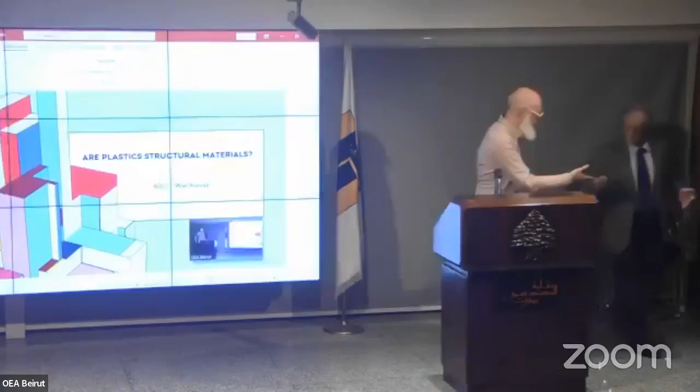Okay. So we'll switch documents. 1 second. Okay, we'll start on page 1. Not 32, or I guess I can start that.

So I will first introduce the practice in general, because we are a research place where we work on materials. Today, of course, the focus will be on recycled plastic. So I'll switch back to start, sorry, a bit quickly. Where is the document open there? So here we are.

I'm directing two practices. One is located in Lebanon, it's Bits to Atoms, where we work on digital fabrication, and the other one is Post-Industrial Crafts, which is located in France. So I'm an architect, I make buildings, but I also make robots. And I also hack old robots from automotive factories, and then I transform them into large 3D printers with which we do furniture, which we sell.

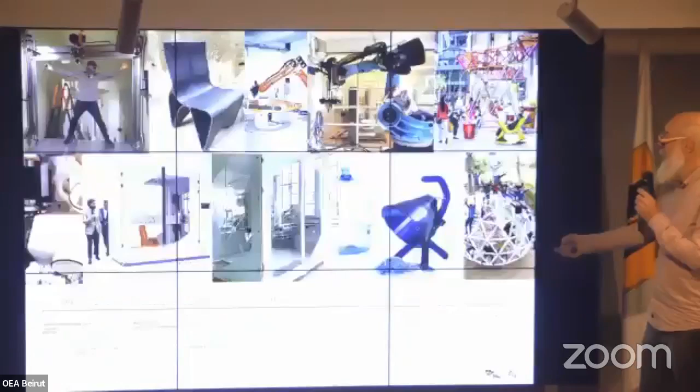So this has been a long journey. This is about the last 10 years, from creating my first own 3D printer 10 years ago, and then doing first furniture, then buying my first robot, transforming it, etc., until we reached a point whereby from furniture, we moved gently toward the architecture scale. So this has been done through several machines, through several systems.

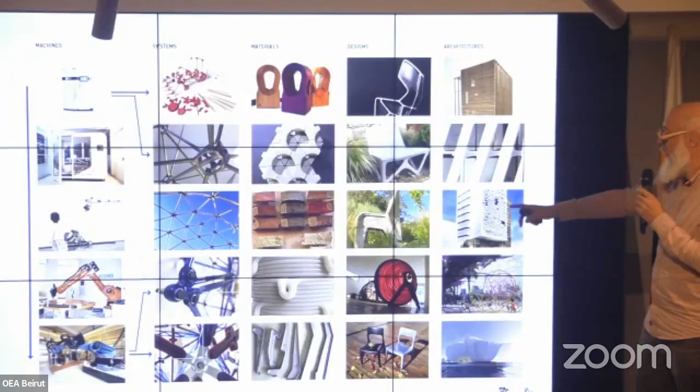So we first had the first 3D printer, got our first robot, and made our first 3D printing robot to create various structural systems using various materials, from recycled paper to wood, concrete, recycled aluminum, recycled plastic, to work first at furniture level. That's how we do our small prototypes, because it's relatively not as costly as doing architecture. And then we either use our architecture projects as a reason to experiment with the material and the process that we are setting up with our robots, or we do our own research.

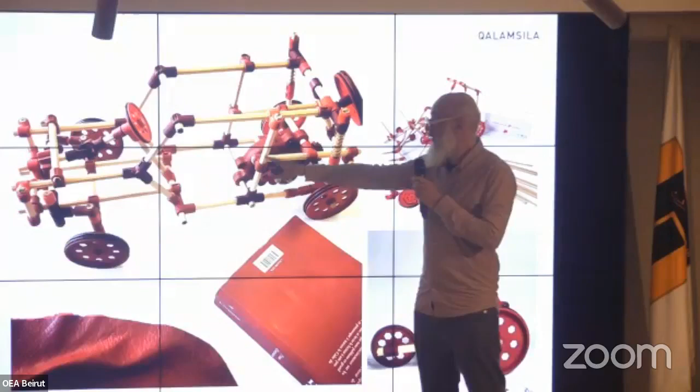So we've always been very much into structure. So 3D printing with plastic, with a laser printer, we've been creating this construction toy, which allows kids to play with wood pencils in order to build about anything. So you see here, that's how I became a bit of an engineer, because I designed an engine which works with a spring, but I had to do everything in order to make it. So it was quite fun for an architect, to do a bit of engineering.

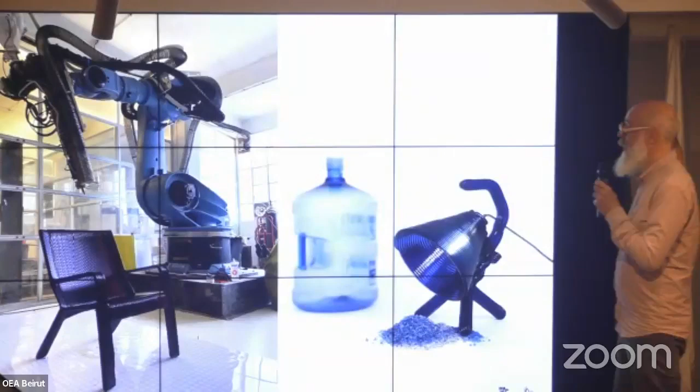And we have our machines, we get them used. We build the extruder, and we build the controller and the codes to make them work. And with this, we manage to produce some stuff. So what we do is that we collect from the environment bottles, which are made out of polycarbonate. Once they get a bit too dirty, they are trashed away. So we recycle them, we crush them, and we use that crushed material in our robot in order to produce furniture. So that was the first move.

You can see the first chair we've ever printed. That was like 4 years ago with our first machine. And then we moved on, and we're recycling more materials. Now we're recycling car headlights because it's a very good polycarbonate, which is quite transparent, which allows us to play with color.

And we started gently in our furniture to make structures, because indeed, you can see that those parts are 3D printed, but also the center one, the structure itself of this large lamp, is also 3D printed with an assembly, a bit like you would assemble wood somehow. Still a very basic assembly, but you can see some triangles which are there for structural strength, which are carrying this structure. So we got our first small contracts.

This one was for Hermes in Dubai, and it was a very little architecture scale, but we only did those panels, in fact. So the structure is still a wood structure on which they are mounted, which was not really quite interesting, but that was the first move. And from that crushed material, those bottles, we started to print beams, and you see, we prepare a hole for a connection, so we could do some assemblies, and we could start to be structural.

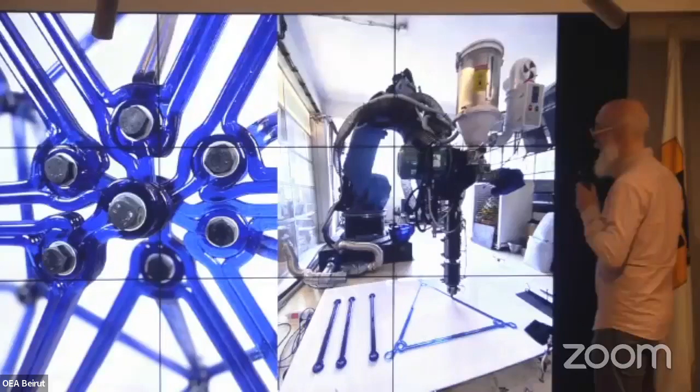So the first approach to structure was to have a first layer of triangles, then tetrahedrons, and then hexagons, and create a space mesh with this material, which is very flexible. Compared to concrete or steel or whatever, you're facing a very weak material compared to what we're used to. So you need to put more brain into it and more geometry in order to get the strength you need. And you need to give it more volume.

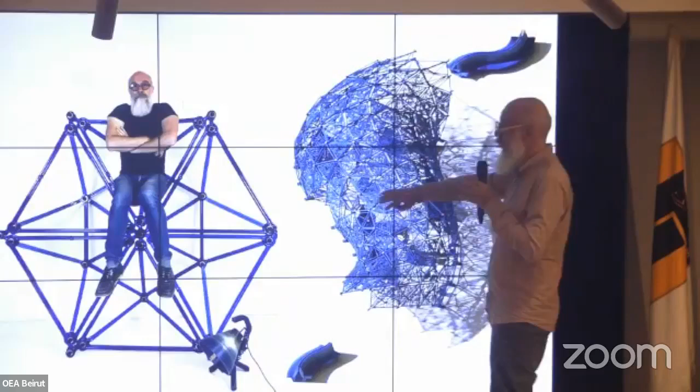So you can see the first attempt, the first prototype we did of a space frame. I'm sitting on it because obviously the strength is directly in question as we use polycarbonate, which has a lot of qualities, but you see this one here, it's bending under half of my weight. But when it's all together and the pressure is applied directly on the point, you can still cross some good distance. And because you've got a great height thanks to this structure, the ratio of the weight of the structure compared to its capacity is interesting.

And the good thing is that as this design is entirely coded, our code takes the base geometry and sends it directly to the robot. We can have extremely complicated structures with every beam and every triangle unique. The complexity is not a problem for us because we don't see it. It's all managed by the code that sends it directly to the robot. We just have to order and then assemble them, without having to know any number or any angle in this kind of structure. It could make things complex. We still didn't reach there, but we started to reach some elements.

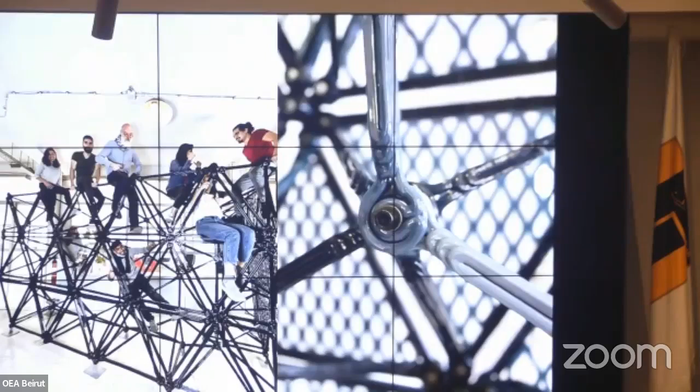So the recycled plastic has various qualities and comes from various places because we have to gather it a bit everywhere in Lebanon. It's not completely easy to do. But you see, we start to have some structural answer to this thing. As noted, it's not really calculated. It's more we do it and then we jump on it to see if it's strong enough. That's a bit the technique. But it's a kind of valid technique when you have a big workshop and you're able to print like this. You learn a lot more by doing it than by trying to simulate it. And somehow it was useful.

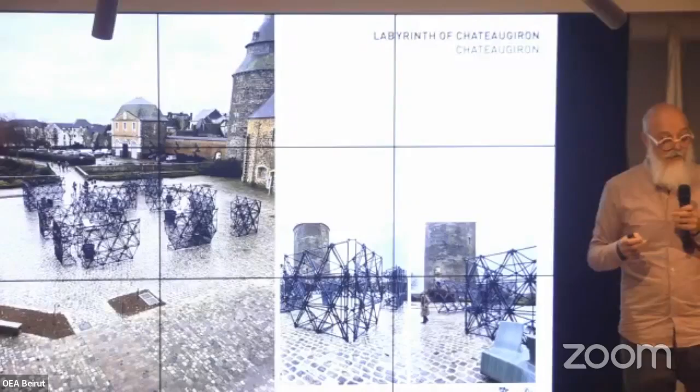We used it to answer a competition in France. And now this structure is a permanent structure in France, in the courtyard of a castle. It creates a labyrinth, which is dismantled and rearticulated to host 3 festivals every year, and in the empty time another shape of labyrinth is created, doing placemaking inside the large courtyard. It froze one morning we were installing, but polycarbonate is also used for astronaut helmets at -250 because it can stay flexible and resistant at these temperatures. That was a freezing morning in Brittany in winter. The contrast between this weird structure made from about 30,000 recycled bottles and the old stone was quite interesting, and part of the success of this installation.

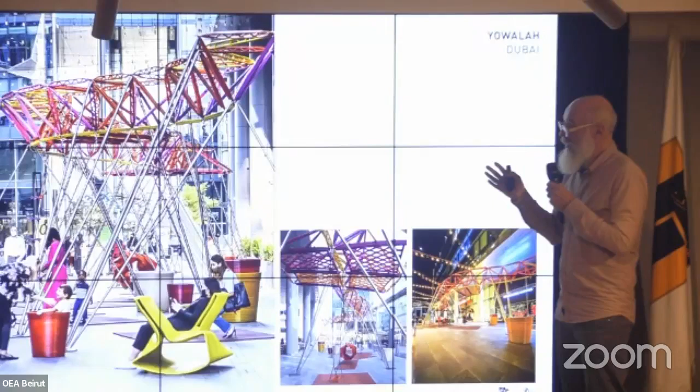We did it again in Milan as a support for an exhibition. This time we got a lot of transparency by the change of material. We pushed it further by making it the center of attraction when we answered the competition by the Royal Commission in Dubai to create an attraction in public space to get people out of their homes post-corona, to do some sport and have some communication. We proposed to build a large beam spanning 40 meters long at 3.5 meters high, made completely out of recycled plastic, that would hold people swinging under it. And this time, this beam was completely made out of recycled plastic.

So we had to make every segment also a beam itself with reinforcement in order to get the strength needed. But somehow we managed to get a structure that was really sturdy with almost no flex, very strong. All the moment, the resonance or whatever, it worked very well.

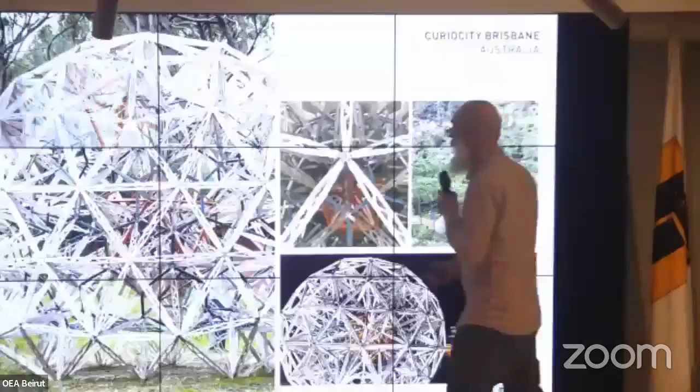The thing we had to do to reach this is insert a metal flange inside the print while we were printing, so the flange would be stuck in the plastic. We did some traction tests, and it needs above 1.5 tons to take it out. It doesn't get out - in fact, the plastic breaks behind it.

And this allowed us to connect many points on one screw. Because with plastic, we needed to make it a lot larger - you need to enlarge all the dimensions because your material is several times weaker. So if you get many beams with that enlargement, you get a giant knot and you cannot make it through. So this was a good solution.

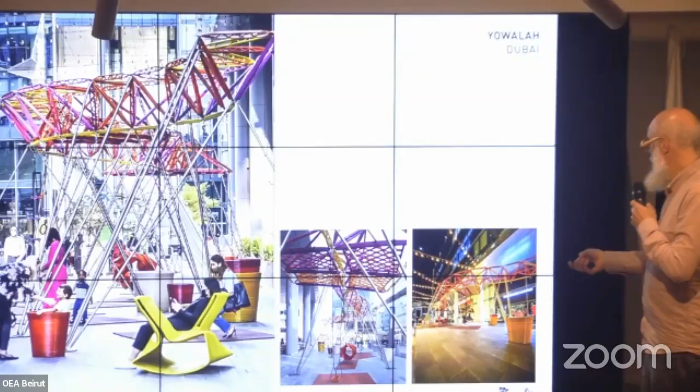And you see, we did everything in recycled plastic - from the ladder things, the rings, the seats and stuff, but also the seats for the swings. It was assembled overnight over there at the show, in kind of those conditions you get when you're inside a festival. With great success, and it became - it was just a test, and it became a permanent installation, which is in a park in Dubai.

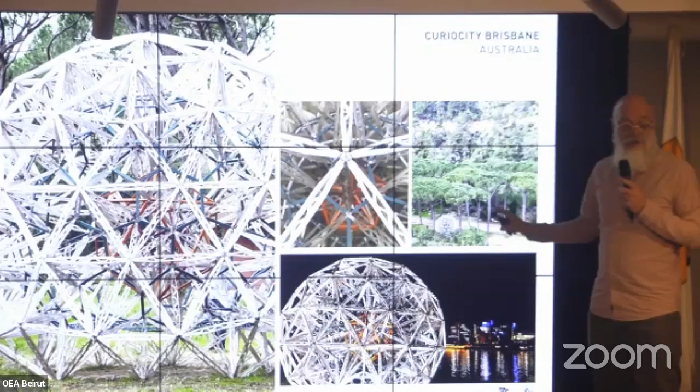This was also a bit more pushed, one in Brisbane, Australia - a competition that we built here in Lebanon. This is the test assembly. It's the architecture student that built it again in Brisbane, next to the Brisbane River, for an art festival.

And so the same system of beams - you see, I'm standing on it, so it's always a bit the proof of the idea, because of course, as we don't calculate it before, we do it and then we test it, and then that's how we prove the thing, and then we assemble it.

But we use shapes which have a lot of intelligence, and we use that instead of doing a big slab a bit stupidly. Here we have to use a very intelligent shape that would compensate for the weakness of the material, so the proportion of strength is reduced and the proportion of intelligence in the shape is very much enlarged. That's why we get this kind of shapes.

So this made us think further. Instead of thinking with segments, we started to work more as cells - assemblies of cells which are printed separately, and kept together to create larger elements.

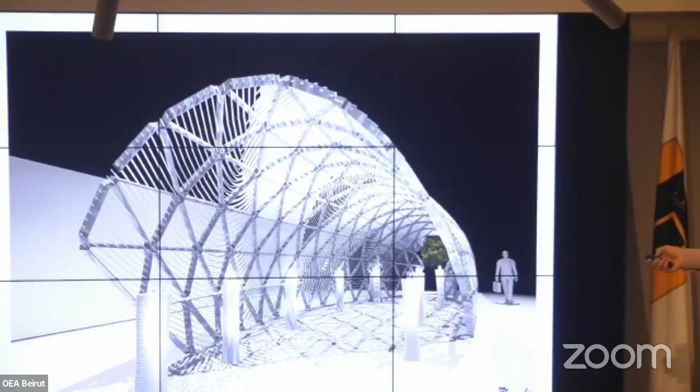This last one is for a French perfumer—a pavilion, which is very interesting. Instead of paying someone to make a stand with a stand designer, they preferred to invest in someone doing research for architecture. They gave us a subvention for our research, and in return we gave them a pavilion as a result. It's far more productive than making a stand and then trashing it. They're even sending it back to us so we can recycle it and give the plastic another shape another time.

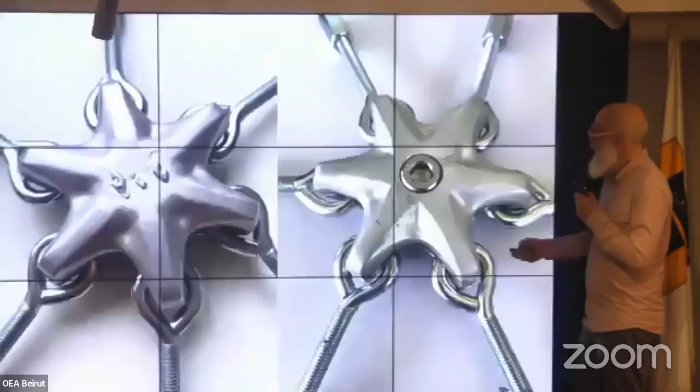This was a 3D printed model, and this time we had a clearer condition because we only had hexagons divided into 6 triangles. So we had connections with 6 — we were at the limit of the structure.

We took the occasion to design connectors made entirely from local recycled aluminum. You can see it could be open — it's a kind of star — and it has two faces held together by one screw.

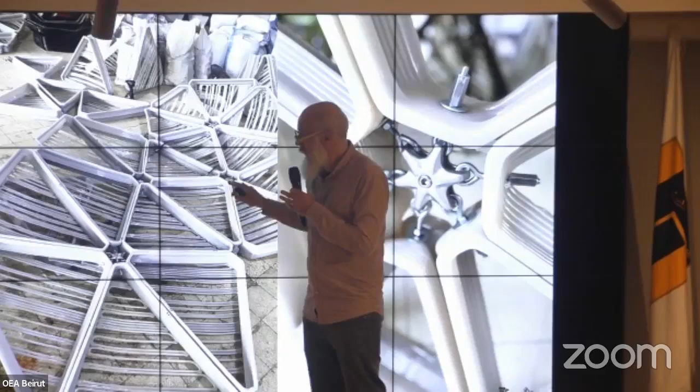This is the one we put in the same way as explained before, putting together those cells and connecting the ribs, the stiffeners, which get into one another. Because of the code and the angle on the walls, when you put them together you start to create the full shape of the pavilion.

Here you can see the scale — you can see workers inside in yellow, and that's the scale of one triangle. One triangle is about a meter. Of course, there are 190 triangles, and they are all unique, all with different shapes, but the average shape was about a meter.

That's how you lie inside of the structure. You could see the hatch we put in, continuous, going through all the elements that are printed separately. But when reassembled, there's a continuity of the structure and the texture — a bit like a river flowing through the shape. So you have a kind of 2D shape and a 3D shape merged together to create this intriguing object.

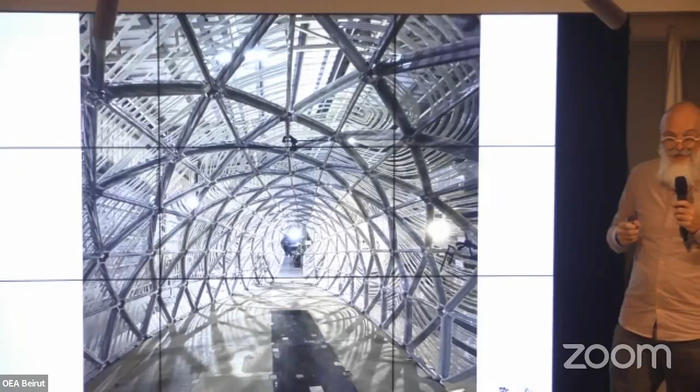So here was the first dry run in a location away from the exhibition, because we had very little time to do the full assembly — we had a single night to do it before the show. So we trained a team of Bangladeshi workers. We explained the logic of the puzzle, and they all found it very fun — they collaborated a lot and got very fast at it by the end.

It was very, very interesting for us. They understood how this was conceived, and it was a very nice experience with the team to make this happen.

Finally, it was built on place, and the perfumer came to present his creations, which were all put very preciously on stands that we also 3D printed from the same material. They were lit from inside, giving reflection and quality to the product on top of every element, like few trees inside.

Of course, at the limits we had special conditions. Here you see we're on an edge, so we have only 3 triangles. We still need to pull them all together, but we don't have anything on the outside limit because we cannot put any anchor on the ground in the exhibition space — the structure has to be self-contained and self-maintained. So in fact we had a piece that fit very well inside the female stiffeners on both triangles, resisting the pull from the 3 triangles, which stayed closely together.

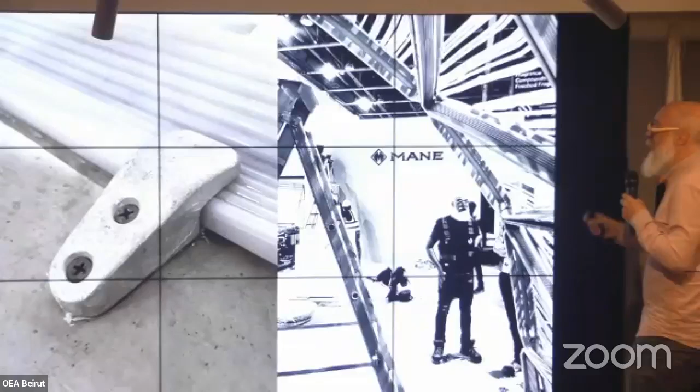A kind of connector that we had the right to put 1.6 centimeters into the ground. So we also created some connectors there to make sure the structure would not shift if any crowd movement bumped into it and took it away. You see here it's during the installation, during the night, when we had to build it.

The latest one we did is trying to be a bit better, because this system has a problem. We drill through the plastic, and it's a weak material, and we're making it weaker. If you drill through it, you create a hole and remove some matter. If anything's going to break, it would be where the hole passes. So I was trying to think of a way to keep those cells together without making any holes.

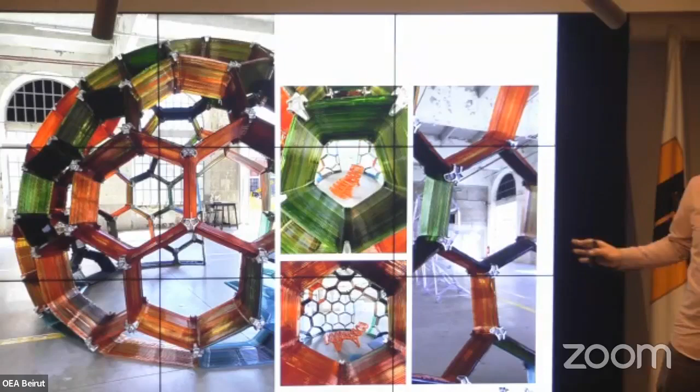So that's how I created another type of joint, made also of recycled aluminum and recycled plastic. The cells are another cell system, a very regular one. It's like a carbon atom, meaning you've got one pentagon and five hexagons around it.

They all have, this time, stiffeners which are towards the inside. And to keep them together, you've got two connectors, which are grippers. They have three fingers, and one bar in the center, and they are put into compression. The more you tighten the screw, the more the three cells are getting secured.

And this way, you secure the assembly, and you don't create any weakness by making any holes into the system. So this has been assembled in France and will now be part of a science museum in Saint-Étienne. This prototype.

The cool thing is that it's made from car headlights. It has a lot of property with the sun and the light. It's quite interesting, and we're going to put some light inside, because we have those two inward stiffeners which are creating a void at every member, and then we'll be able to pass some light inside of this.

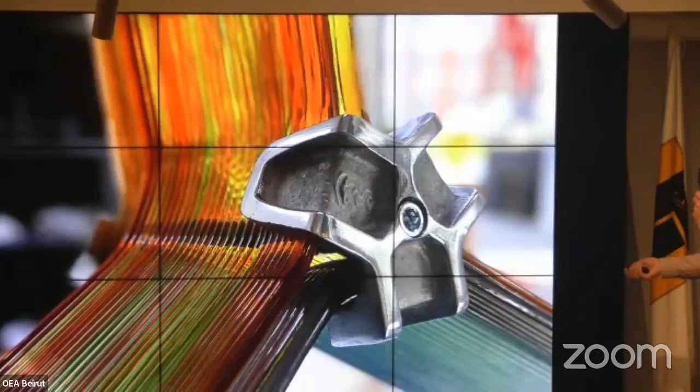So you see, this is a connector in a close view, which is keeping those three elements together. This time we also had only one condition, which was having three cells touching together, because they're all hexagons or pentagons. Now you see the connector itself, to save some money and some material, has also a stiffener and the same wall thickness all the way.

Be sure we have the best result with the cast aluminum. And you can see the stiffener, which is also taking the efforts together to the screw.

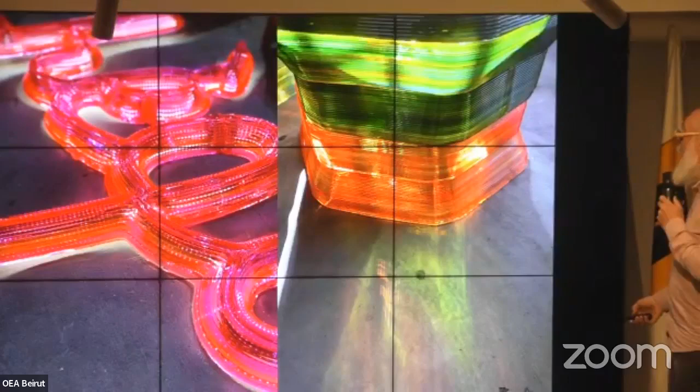Here you can see a bit what's happening with the material in natural sun, and that's how through the surface, which creates a lot of refractions, a bit like a Fresnel lens, and that's what's happening when we're putting some light inside. It's quite fascinating, and so it's a very nice material. It's very rare to be able to build with this kind of property.

One interesting thing is as we print those cells on the ground, we can also print anything at the same time, which means we could print the closure, we could print shelves, we could print tables or benches, and they could be part of the assembly later on. So we could build on this, and we could add a lot of things as we build them, and they could be different. Here you see the test of a bench, of a chair, which are part of one hexagon and another hexagon, assembled together with the same version of the design of the joint before we evolved it.

So the next steps, we discuss a lot with artificial intelligence. It's very funky to throw stuff and get stuff back, to discuss and chat with those systems. We do stuff, we see some stuff, we discuss stuff, and we do other ones.

This is the last chair we did. We created a very funny code that makes hairs. It prints in the air, and so some part of the print falls, creating a kind of a hairy surface on the back of this large armchair. And you see the material is almost glass-like there, because we have very nice material.

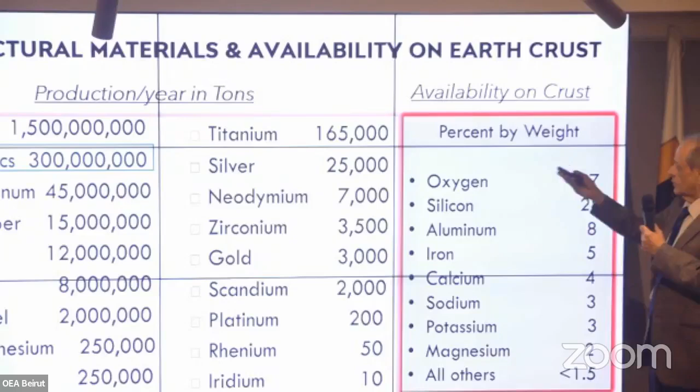And let us say that plastics is the second material being produced, followed by aluminum, copper, and zinc, and whatever. So plastics are not rare materials. We have a lot of plastics in this country and around the world.

Now, plastics, what are plastics? Plastics are synthetic materials or partially synthetic materials that are made of various organic polymers. Polymers, they contain carbon, hydrogen, oxygen, and organic matter. And they are always of a large molecular weight. The molecules of the plastics are strong, but the bond between one molecule and the other is not. This is why they are somehow flexible.

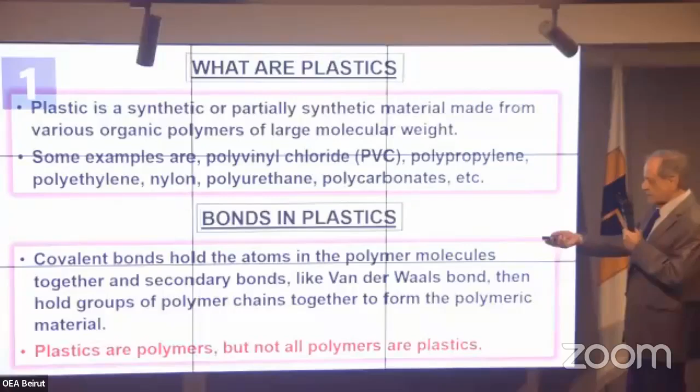Now, the bonds between the atoms of the plastic unit are covalent bonds, while the bonds between one molecule and the other are weak bonds, much weaker than the covalent bonds or atomic. Now, say that plastics, all plastics are polymers, but not all polymers are plastic.

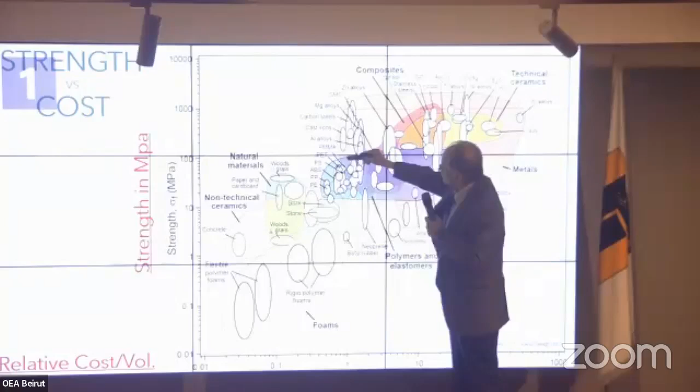Now here I have an Ashby chart that will show us the strength of materials versus relative cost. As we can see, while plastics are here, of course, carbon steel is stronger.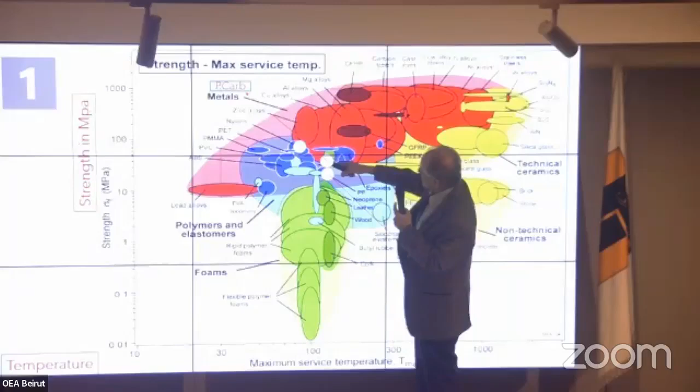In the other Ashby chart, we can see the strength of a material versus the workable temperature. Let us say, we have here plastics in this area, and I have chosen polycarbonates, which is here, and nylon that are here, and we have polypropylene here. I highlighted these because they are the most important ones.

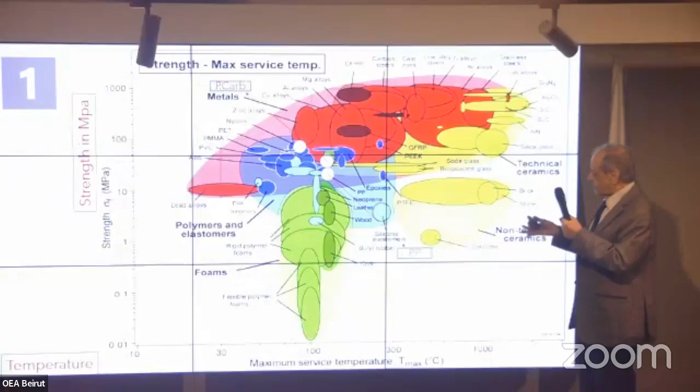Now polycarbonates are strong enough and they can work in relatively high ambient temperature. It doesn't melt at this temperature, and it can be used without excessive elongation at this temperature. So if the ambient temperature is up to 100 or even 120, still polycarbonates can work.

Now, properties of some plastics. I made this chart to show the properties of some plastics. Now, polypropylene has a density around 0.95, slightly less than water. And the Young's modulus of elasticity is low, 1,300 megapascal, yield strength of 33 megapascal, and an ultimate strength of 40. These are average, not really exact, because all plastics have different grades.

But polypropylene has a unique thing about its elongation. Sometimes it breaks at only about 8% elongation, and sometimes it goes up to 600%. I mean, it will elongate very long before it breaks. This is because of different configuration.

Now, polyethylene, we all know there is polyethylene of high density, low or medium density. That's why the density really changes. Now, the minimum modulus of elasticity is this, but the higher modulus of elasticity I didn't show here because it's not yet fixed. And its elongation is 100%.

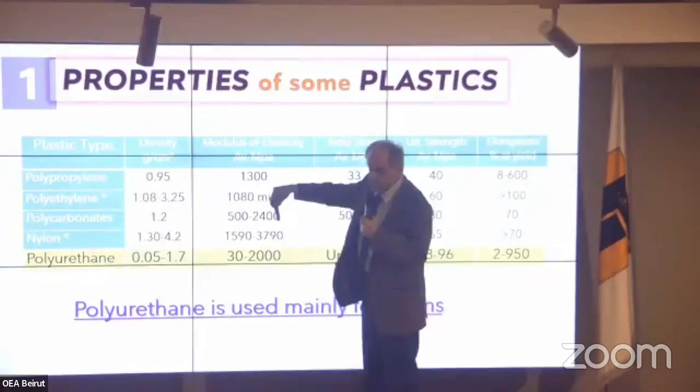Now, polycarbonates, their range is much smaller. That's why the density is around 1, plus or minus. And the modulus of elasticity, also depending on a lot of things, can vary. While yield strength also can vary, but you can see the difference is reasonable.

And its elongation is around 70% plus or minus. And the ultimate strength can go up to 80 megapascal, which seems high compared to the others.

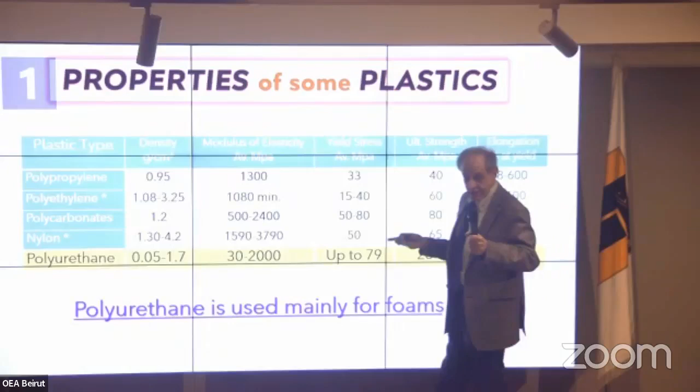Nylons are not really used in real structures because nylons are used in flexible structures, more like bags, like automobile tires. That's why nylons are not used much in construction, but they can be used also in certain cases.

Now, polyurethane is a material that really varies too much. It can be of very low density to a very high one, and it can have a modulus of elasticity between 30 and 2000, which is too much in range. And its elongation can go down to 2%, which is very low, to 950%, which is extremely high.

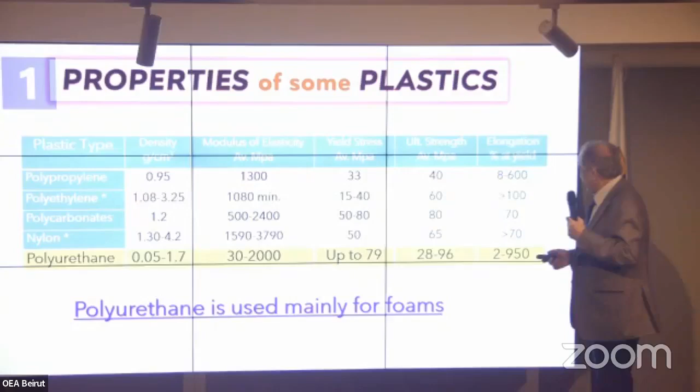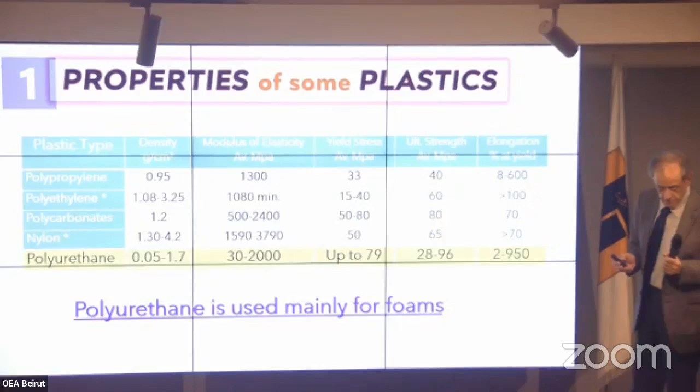The problem with polyurethane is that there is no way to make it more stable and to control this, but we can use it for waterproofing because it can elongate very much. And if we make it rigid, it will lose its strength. So we have a problem. But it is used very much for foams, mainly for foams, not for real solid things. But it can be used.

Now, this is about polycarbonates. Polycarbonates, as we saw in the previous one, should have an E of around 2,400, an ultimate strength of 80 and an elongation of 70.

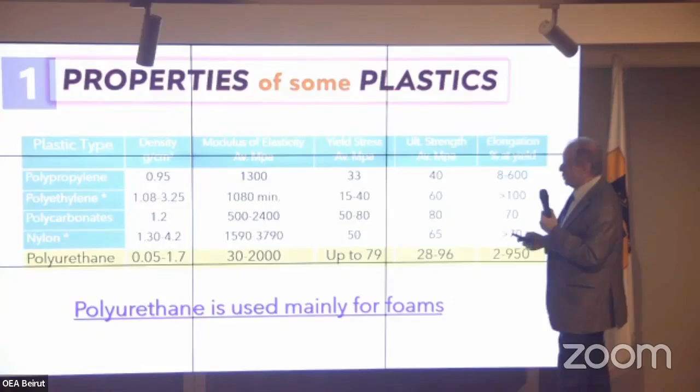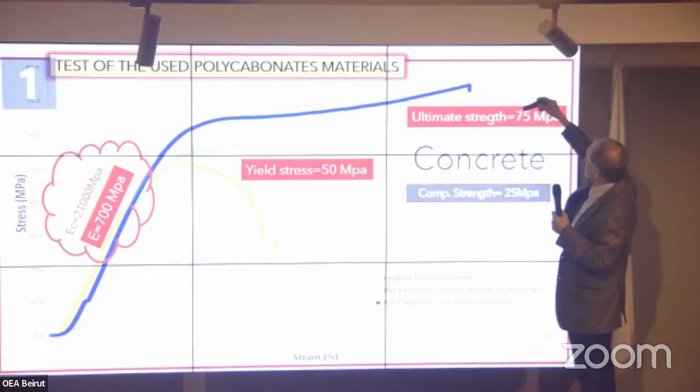We made a test in AUB actually, and this test showed very good results. We found that the ultimate strength that we got from a sample from Guillaume, that is 75 megapascal, which is very close to most of the references mentioned. And the yield strength was around 50.

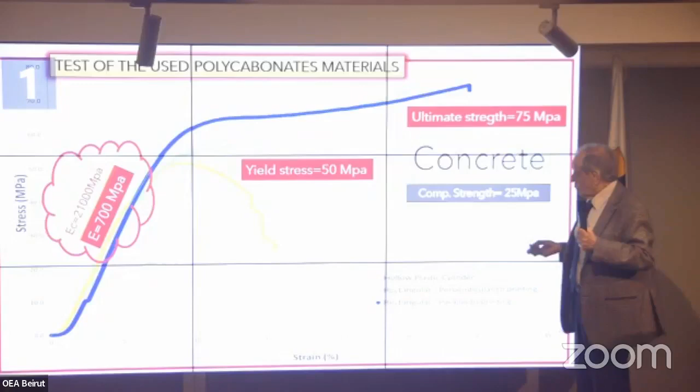Now, if we compare it to concrete, it's much stronger than concrete. It's around 3 times concrete, which makes us think that this material is really strong. It's 3 times stronger than concrete. What do you want?

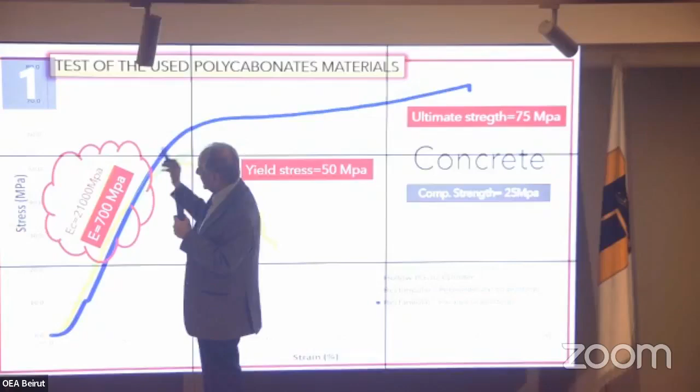You have a problem that the modulus of elasticity is a problem. The modulus of elasticity of polycarbonates was found in our test to be 700 megapascal. Of concrete, it is around 21,000 megapascal. That's 30 times too much. And this is the problem of plastics. All plastics have the problem of modulus of elasticity, not strength.

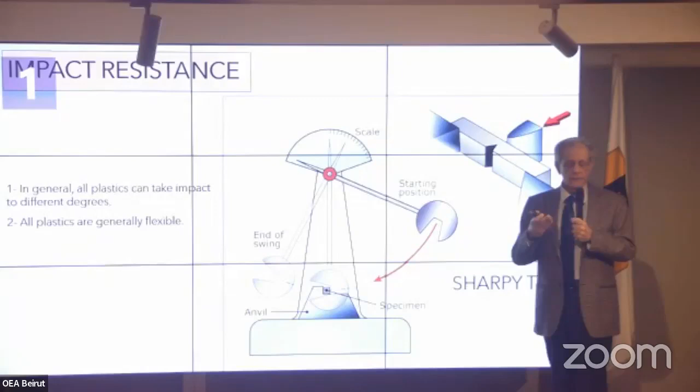Now, here it shows a machine, it's a Charpy test machine. This machine is for measuring the ability of any material to take impact load. Glass can be a very brittle material, it will break easily with a small groove. Steel needs a bigger groove to break. Plastics actually proved that they can take really good impact, very strong in impact.

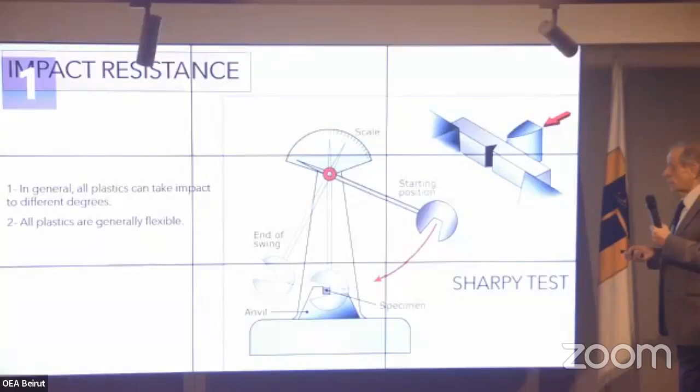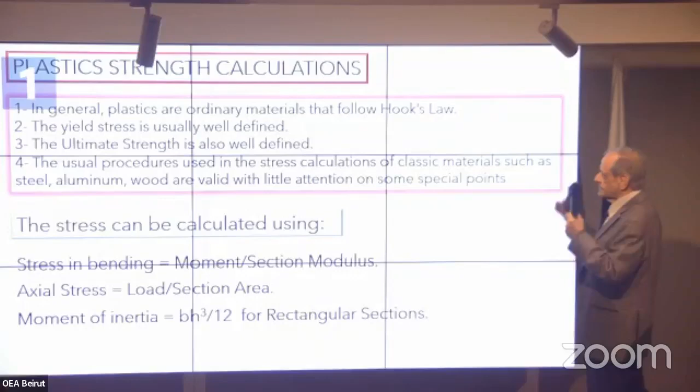Now, in plastic strength calculations, all plastics are ordinary materials that follow Hooke's law. That's definitely, we can say it without any reservation. The yield strength is usually well defined, and the ultimate strength is also. And if we don't know it exactly, we can test it.

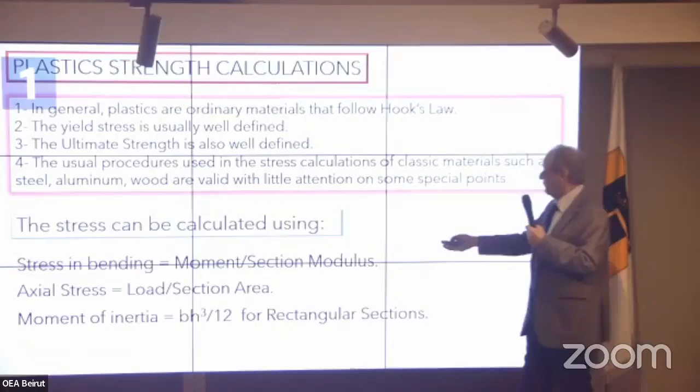And the usual procedure for stress calculation in classical materials such as steel, aluminum, wood, and any other is the same. And the stress can be calculated using any of the formulas that you are using anytime. Stress is load over area, and the moment stress is moment over the section modulus, and the moment of inertia is exactly the same like any other material. However, there are other things that we should take care of.

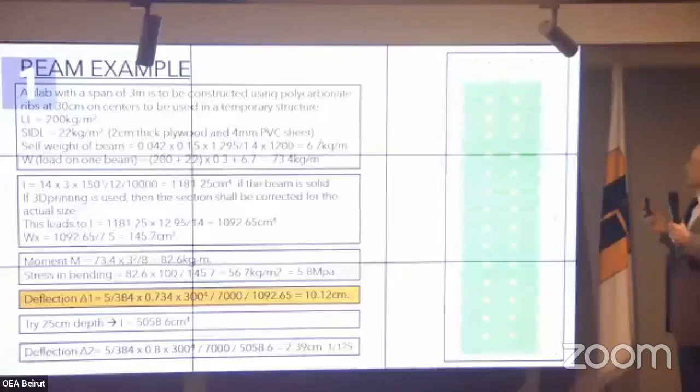For example, I'd like to show you this. This is a simple example of a beam made of plastic, and I made it in the shape of a 3D print. But it doesn't have to be 3D printing. It can be molded as it is, or extruded, not only molded.

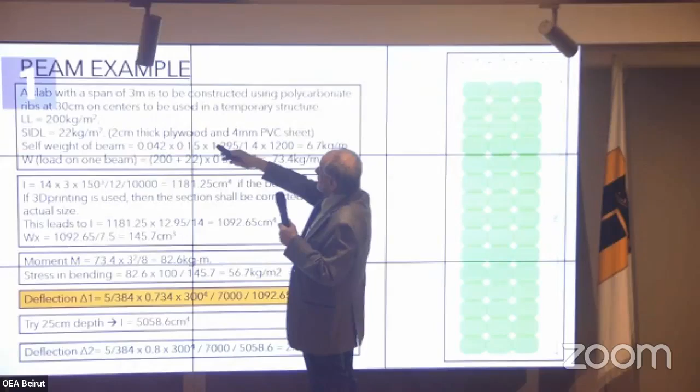Now, if we have a slab with a span of 3 meters to be constructed using polycarbonates, at 30 centimeters center, and we made the calculations. I found that the problem is that, you can see and go through the calculations. I think I have to go through the calculations, but the problem is not the strength. You see,

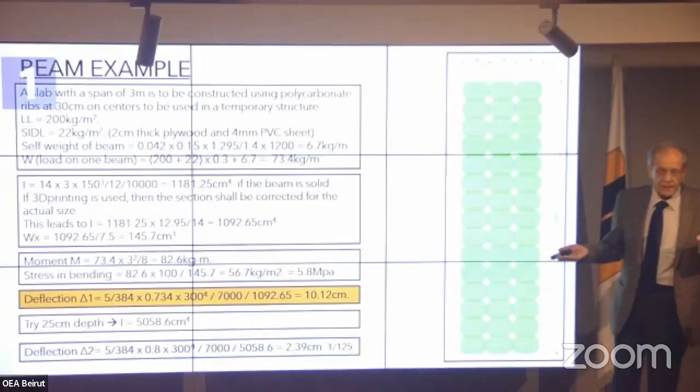the section modulus was 145.7 centimeter cube, and the stress was something like 5.8 megapascal, while the yield strength of this plastic is much higher than that, about 10 times that. So still, it didn't work. Why? Because of the deflection. Not any other reason. The deflection was 10.12 centimeters.

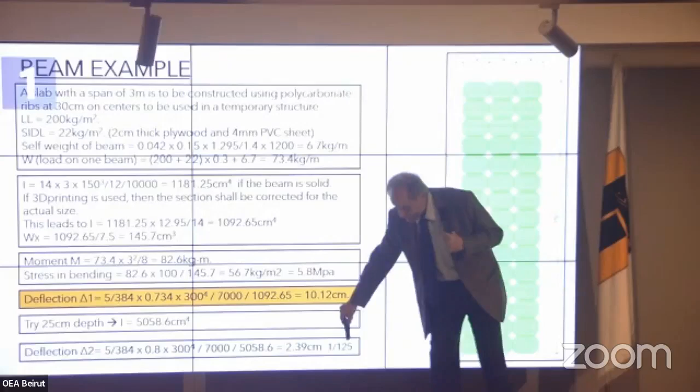So we have to increase the section until we reach 2.39, which is 1/125 of the span, which is still not very good, as we usually accept. However, for temporary structures, this is very good. For temporary structures, this is usually acceptable, but it's not acceptable for permanent structures.

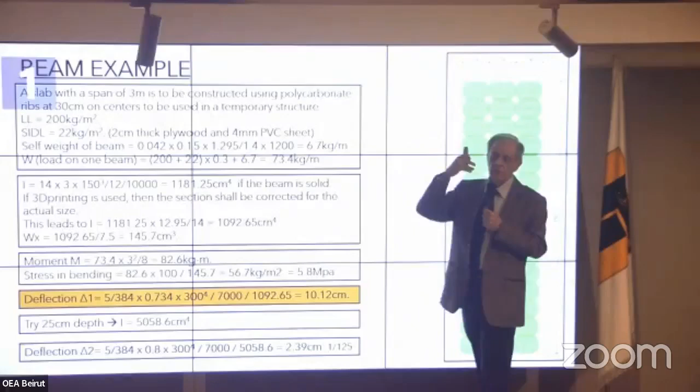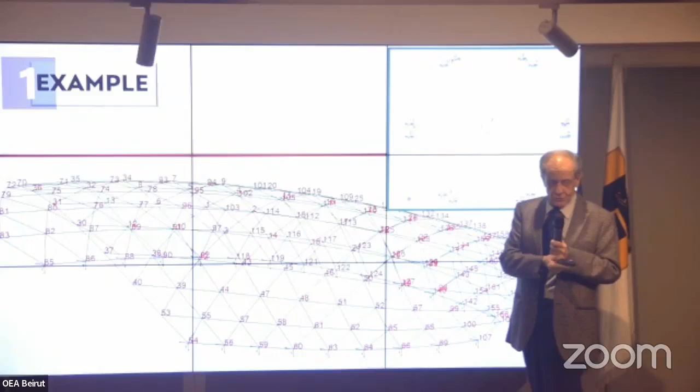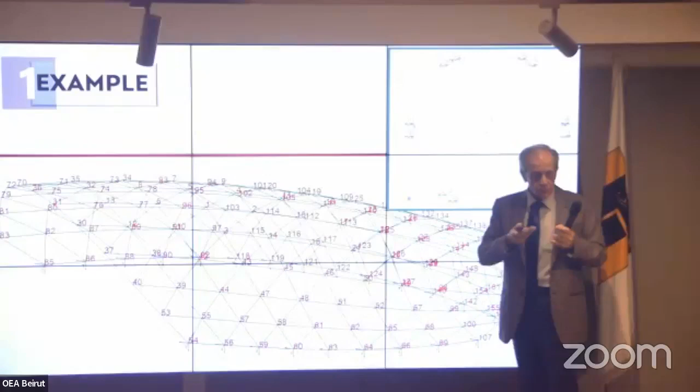This slide shows one of the structures that Guillaume has just done. It's the one done in Dubai, around 60 meters long. Sure, but this is the way it was done, by robot. It's simple, and I'm sure we can do analysis just like any other structure.

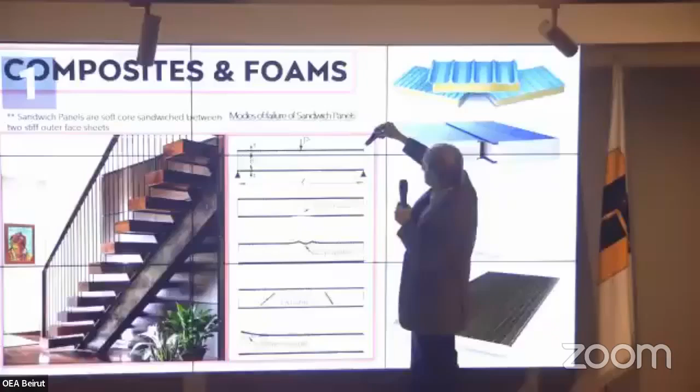Now, the problem, good thing actually, not the problem, in plastics is that plastics can also be used as composite materials with other materials. A composite material is a sandwich panel which is made of a steel plate, about a millimeter, top and bottom, and we have a foam in between, polyurethane foam. As we mentioned minutes ago, polyurethane can be used as a foam.

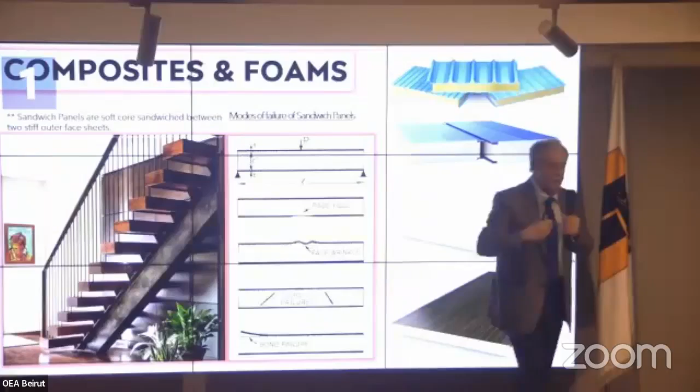The problem with this kind of structure is that the mode of failure is different than the modes of failure of concrete and steel. Most of them will fail in tension or compression, but for this one, the common failure is face wrinkling and shear, not moment. Why? Because, well, we'll talk about it.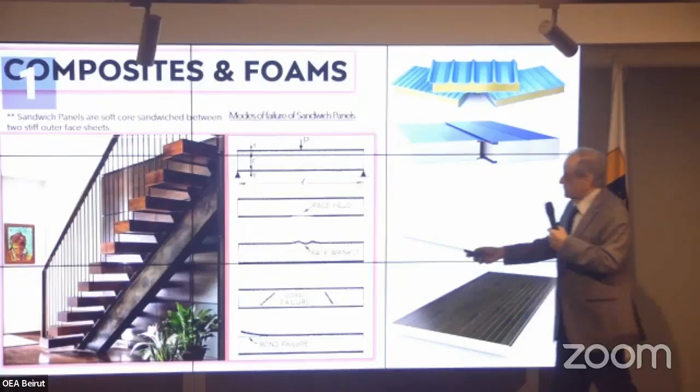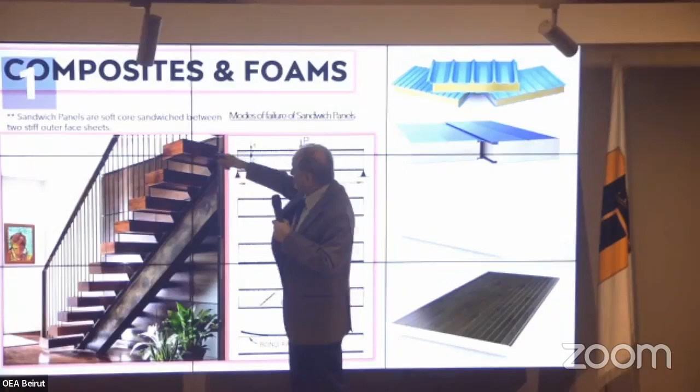I put it on purpose simply to show this picture: pieces of wood put on the steel to create a stair, but it's not actually wood. This is done by very thin plastic that looks like wood and is filled with foam. This is it.

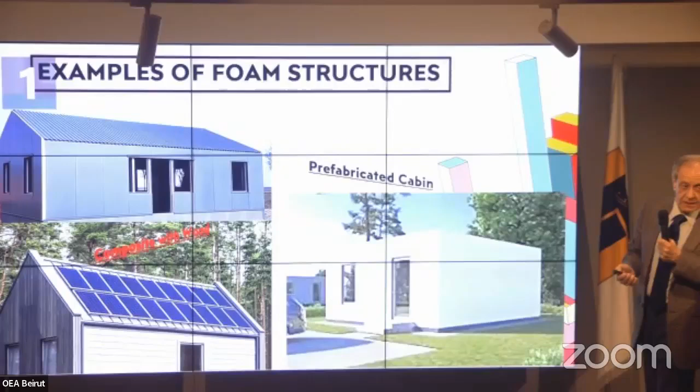Now, there are some examples where foam can be structural material, such as these prefabricated houses, frameless, without any steel. You can create such a thing, or this shape, or even this shape. Easy.

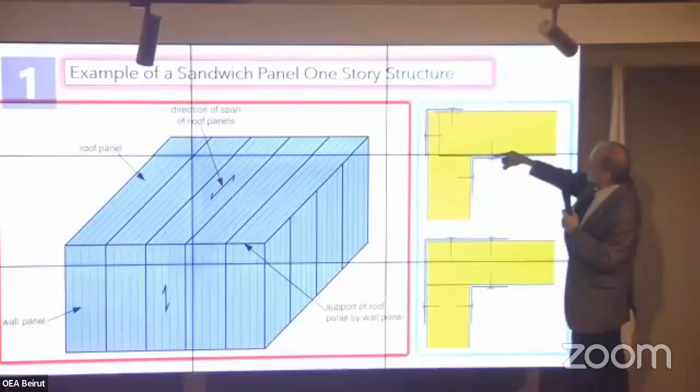Now I made an example of a sandwich panel of one story like this one, simply because it is very simple. And the connection is similar to this. This is not a steel frame. This is simply a flashing to protect the sandwich panel from water. This is not a steel frame. And here, the connection between the wall, which is also a sandwich panel, and the slab, which is also a sandwich panel, is simply a small steel angle, like a bent angle, nothing more.

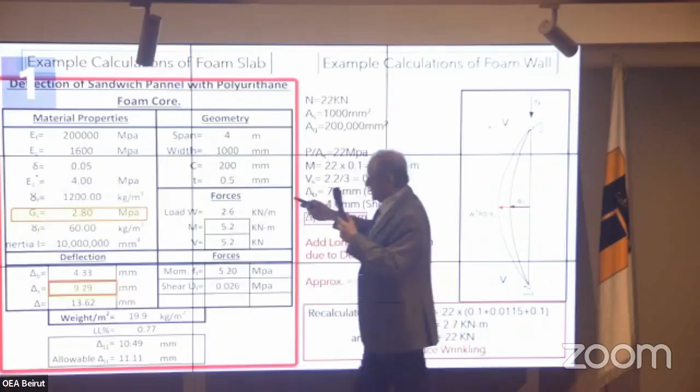Now, let us see this. This example shows us a 4-meter span with a sandwich panel, and it worked for 20 centimeters in thickness. The E, or the modulus of elasticity of the face, which is steel, is around 200,000, while the modulus of elasticity of the filling foam is around 1600 megapascal. However, this is the E of what we call the solid,

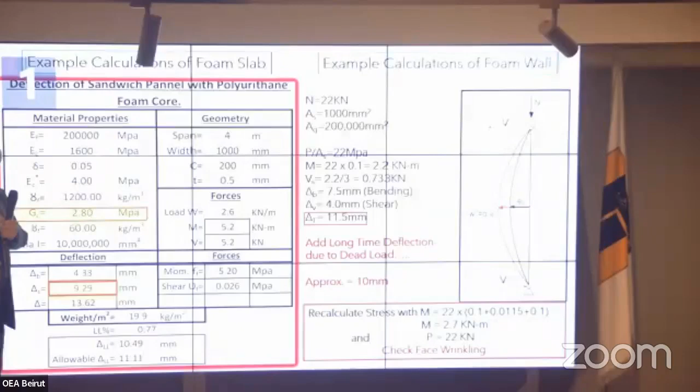while the E of the foam material is usually proportional to the square of the material percentage. So it's 95% air, void, and 5% material in this foam. And squared, multiplied by this, will end up with a very low modulus of elasticity. If we do this, and we take the shear, which is usually taken around E multiplied by around 1 minus Poisson's ratio, it will end up something like that.

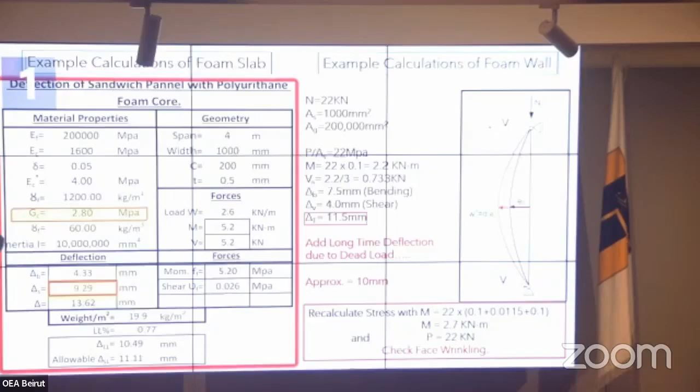Now, whatever it is, the most important thing we cannot overlook is the deflection. Deflection due to moment and bending is only 4.33 millimeters. While in concrete or steel or aluminum or glass or any other material, we don't usually consider deflection due to shear, in foam we cannot. Deflection due to shear turned out to be 9.29 millimeters, more than 2 times the deflection due to bending. And this is unusual. So the total deflection was like that, and even this was not that good yet. But at the end, it worked.

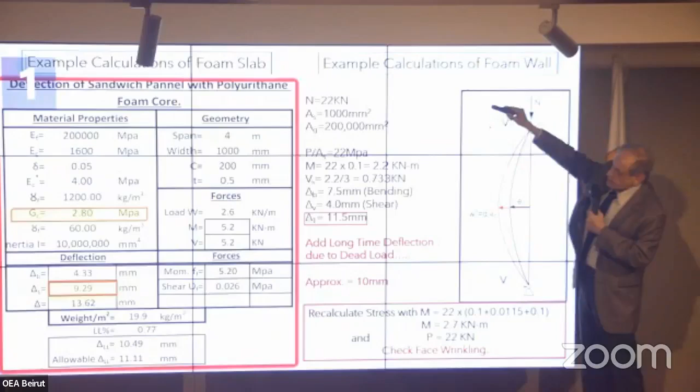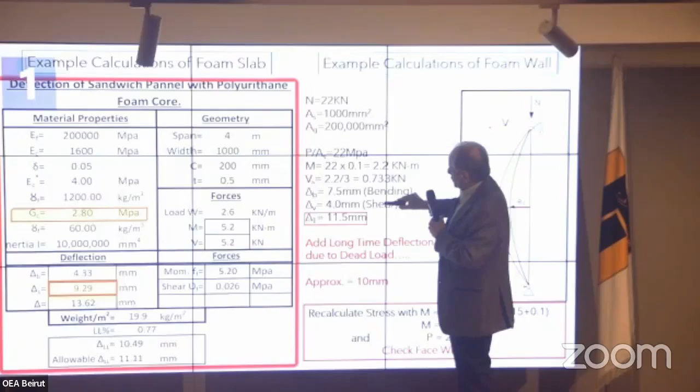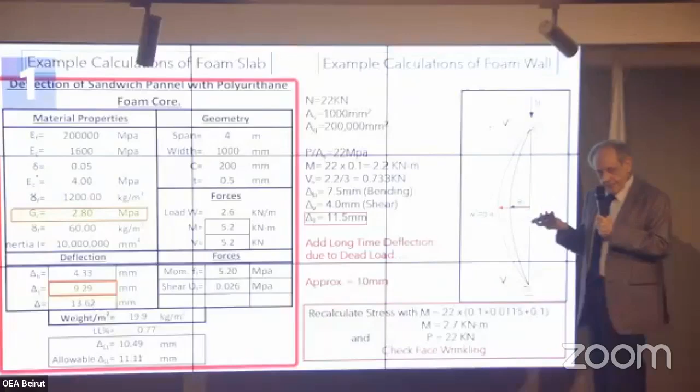I will also continue. Also, foam walls can be designed and analyzed like any other one, taking into account the moment and vertical load, but we cannot overlook the deflection due to shear. And to the deflection due to shear we have to add the long-term deflection, which will end up with bigger deflection. That's why this is the problem in walls.

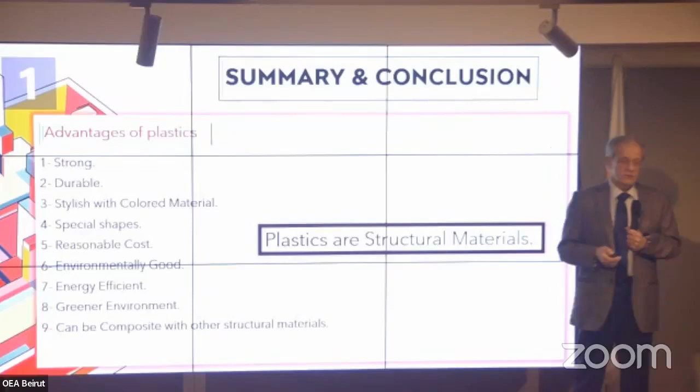Now, plastics are good to build durable and recyclable material and reduce carbon. And we can say at the end that they are strong, durable, stylish, with reasonable cost. They are reasonable cost because they are recyclable, they end up with a greener environment, and can be used in a composite way. So plastics are actually structural materials, and I hope that you are convinced that they are structural materials. Thank you very much, and sorry for taking all this long time.